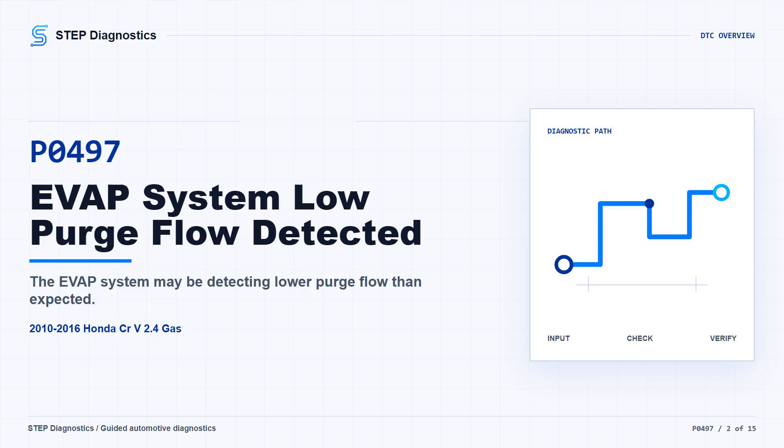Start with the basic system checks and follow a structured diagnostic approach. Then turn the vehicle to the on mode, clear the code with the HDS, go into EVAP test and run the function test. If the result is OK, treat it as an intermittent at this time.

Check for poor connections or loose terminals at the FTP sensor, the EVAP canister purge valve, the EVAP canister vent shut valve, and the PCM. If captured data is available, try to reproduce the operating conditions that were present when the fault was recorded.

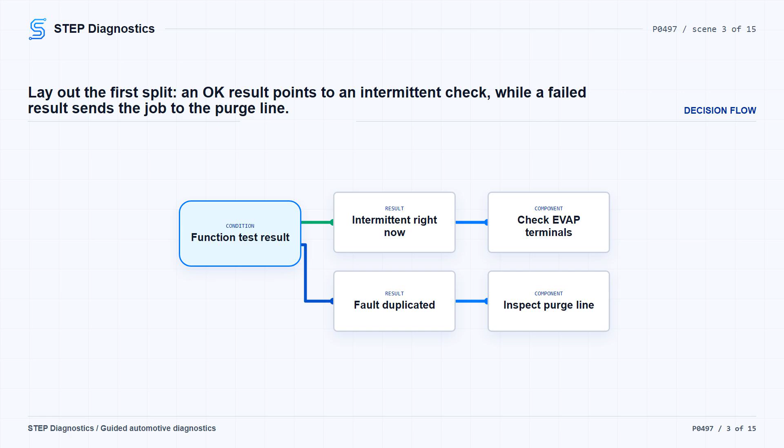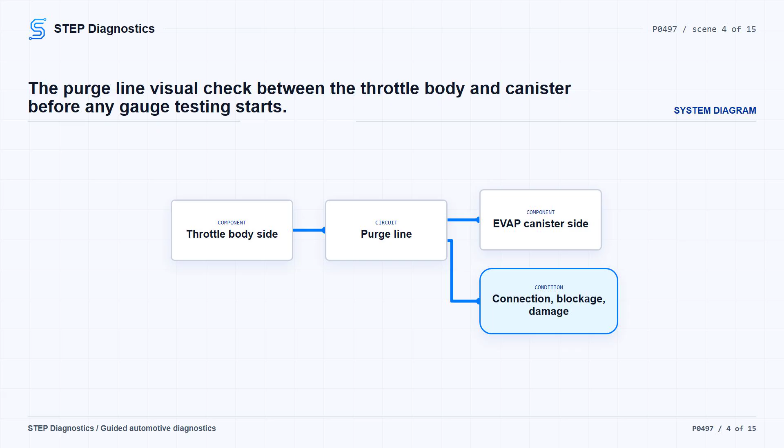If the result is not OK, the fault is duplicated, so move on to the purge line inspection. Turn the vehicle to the OFF lock mode. Before putting gauges on it, inspect the EVAP canister purge line between the throttle body and the EVAP canister. You are looking for a poor connection, a blockage, or damage. If the line is not OK, reconnect or repair the EVAP canister purge line.

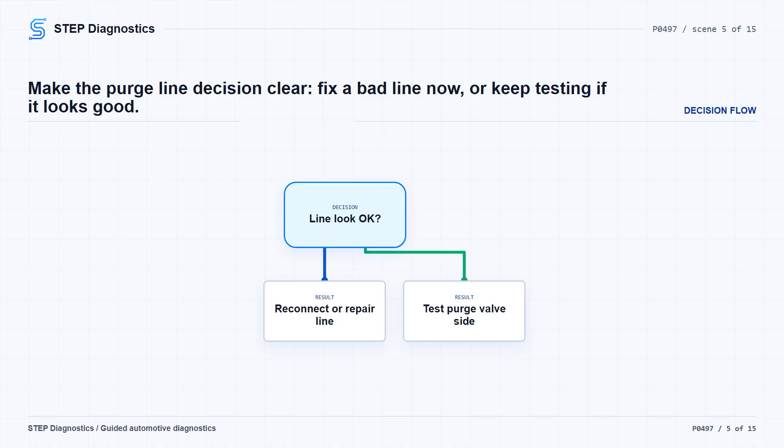If the line checks out, continue with vacuum testing at the purge valve side. Disconnect the vacuum hose or purge line from the EVAP canister purge valve in the engine compartment. Connect a T-fitting, a vacuum gauge, and a vacuum pump/gauge rated 0-30 in Hg to the hose. Turn the vehicle to the on mode.

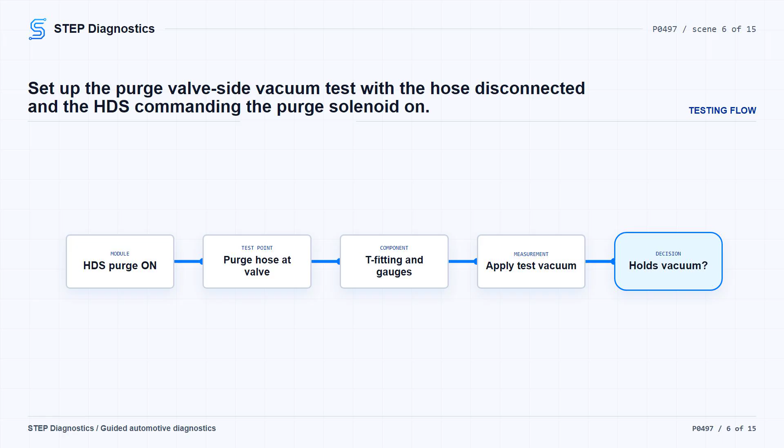With the HDS, go back into EVAP test, select EVAP PCS on in single solenoid, and apply about 2 kPa, 0.6 in Hg, 15 mm Hg of vacuum to the hose. Watch whether it holds vacuum. If it holds vacuum, the diagnostic path calls for replacing the EVAP canister purge valve. If it does not hold vacuum, keep going farther down the purge path.

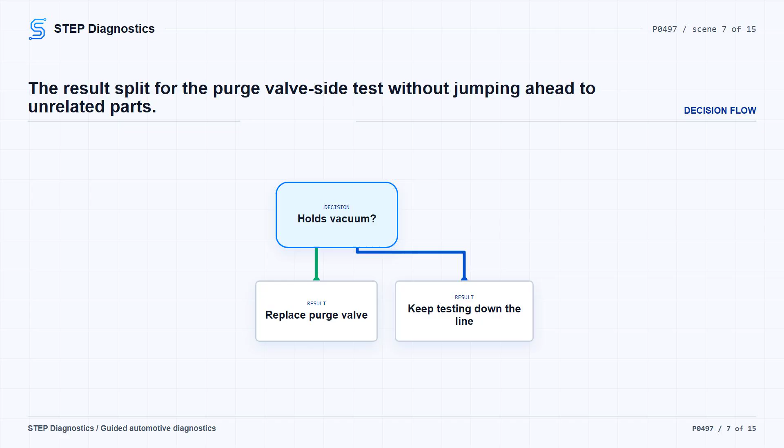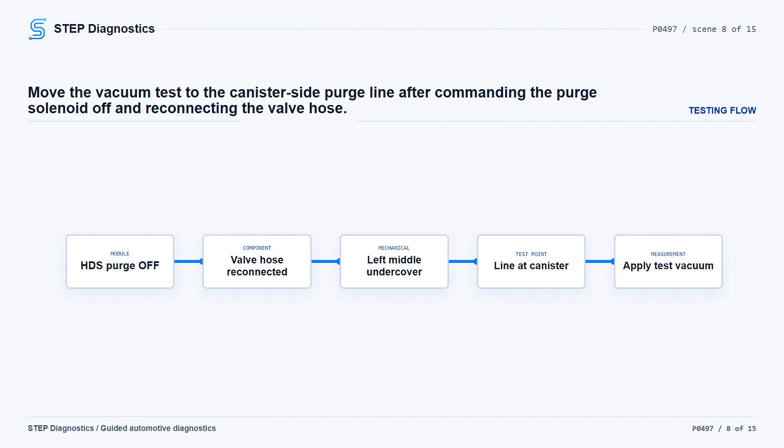Next, use the HDS to select EVAP PCS off in single solenoid, then reconnect the vacuum hose to the EVAP canister purge valve. Remove the left middle floor undercover. Disconnect the EVAP canister purge line from the canister and connect the T-fitting, vacuum gauge, and vacuum pump/gauge to that purge line. Apply about 2 kPa, 0.6 in Hg, 15 mm Hg of vacuum to the hose.

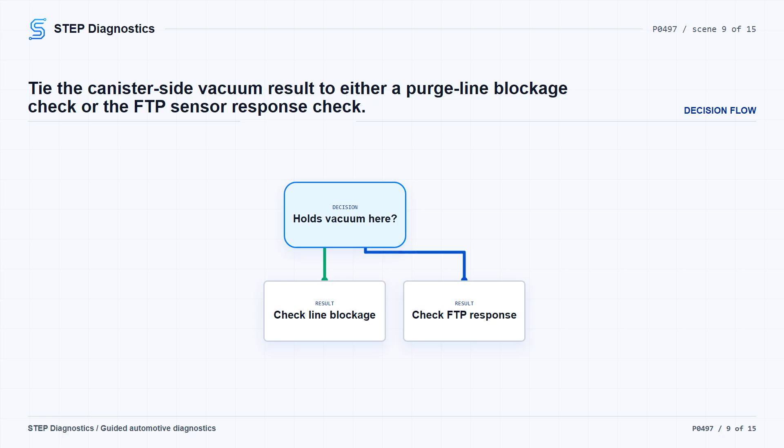Then select EVAP PCS on in single solenoid with the HDS. If it holds vacuum here, check for a blockage in the purge line between the EVAP canister purge valve and the EVAP canister. If it does not hold vacuum, move to the FTP sensor performance check.

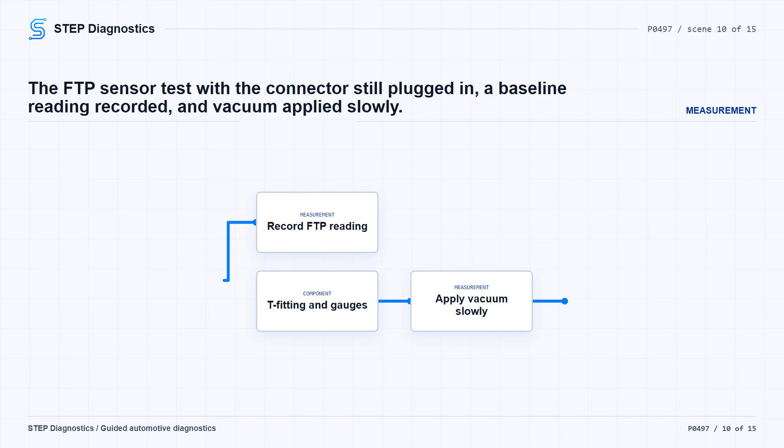Turn the vehicle to the OFF lock mode. Remove the FTP sensor with its connector still connected. Connect the T-fitting to the vacuum pump/gauge and connect the vacuum gauge to the FTP sensor. Turn the vehicle to the on mode. Check and record the FTP sensor reading in the HDS data list.

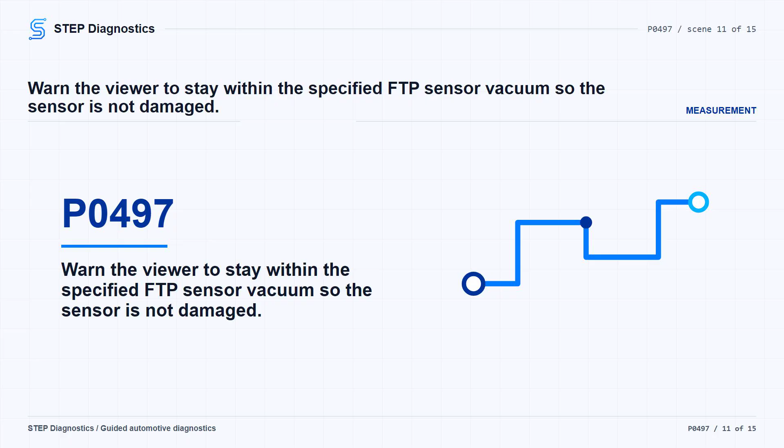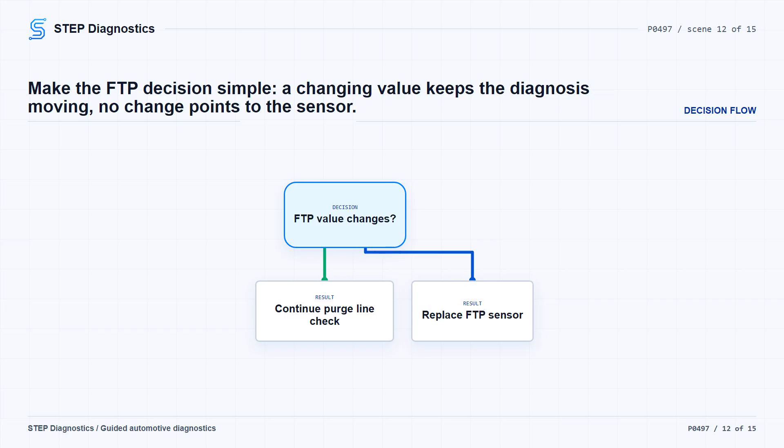Now slowly apply about 1.3 kPa, 0.4 in Hg, 10 mm Hg of vacuum to the hose and watch the FTP sensor value in the data list. Be careful not to exceed that vacuum because the FTP sensor can be damaged. If the value changes, continue to the next purge line check. If the value does not change, the diagnostic path calls for replacing the FTP sensor.

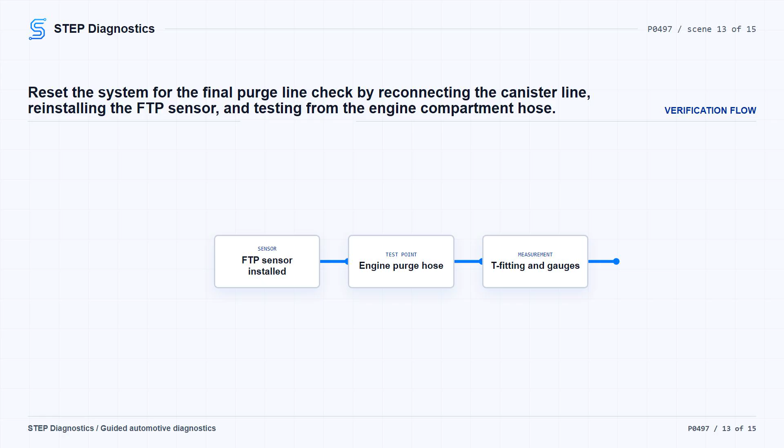Turn the vehicle to the OFF lock mode. Reconnect the EVAP canister purge line to the canister and reinstall the FTP sensor. Then disconnect the vacuum hose or purge line from the EVAP canister purge valve in the engine compartment. Connect the T-fitting, vacuum gauge, and vacuum pump/gauge to that hose.

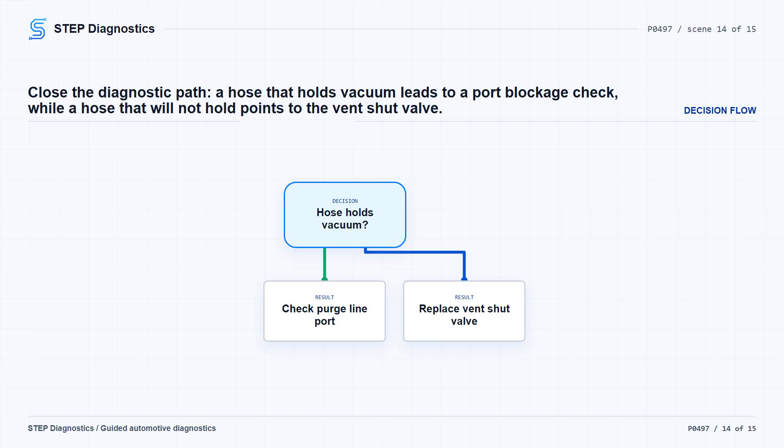Slowly apply about 2 kPa, 0.6 in Hg, 15 mm Hg of vacuum to the hose. If the hose holds vacuum, check for a blockage at the EVAP canister purge line port. If the hose does not hold vacuum, the diagnostic path calls for replacing the EVAP canister vent shut valve.

The takeaway on P0497 is to prove the low flow condition first, then work the system in order: line condition, purge valve control, canister side flow, FTP sensor response, and the final purge line check.